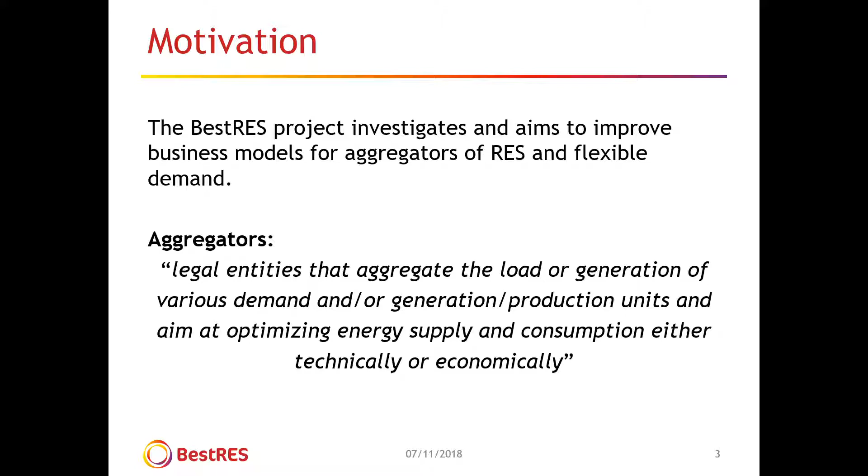In this project, we have a lot of partners. First, the coordinator is WIP from Munich in Germany. There are the technical partners 3E from Belgium and Technical University of Vienna. Then we have legal partners, Stiftung Umwelt- und Energierecht from Germany. And URIS is supporting us with the dissemination.

Furthermore, we have a lot of aggregators in the consortium that cover a lot of European countries. We have Next Kraftwerke, which you probably know, active in Germany, Belgium, France and Italy. We have Good Energy, an energy supplier in the UK. We have EDP, the Energias de Portugal, a supplier in Portugal and Spain. And furthermore, we have a research center in Cyprus, supporting us to bring the south eastern perspective into the project.

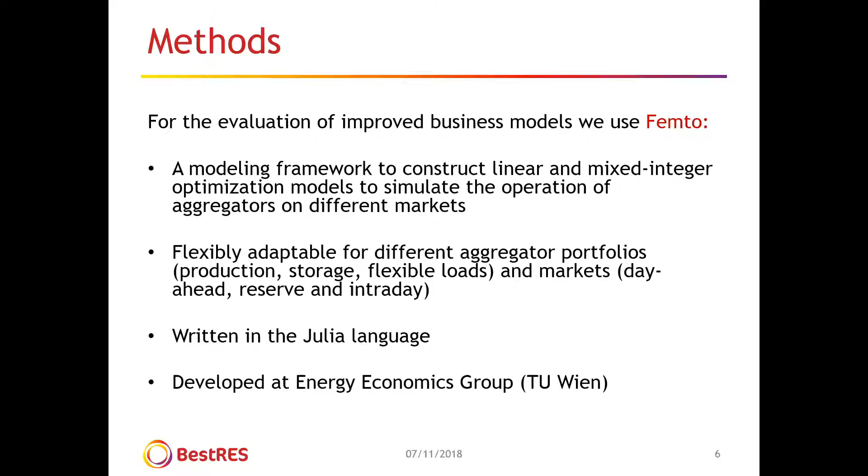I won't stick too long with the methods, but just to give a quick introduction, we used here a simulation library that we developed at our institute that allowed us to model and simulate all these different kinds of business models that have been developed.

Now I will go to the first example, which focuses on the aggregator EDP. EDP wants to use the flexibility of their medium to large scale energy customers to optimize energy procurement or reduce imbalances. I'm not sure how much you are aware of these imbalances, but balance responsible parties are obliged to match demand and supply, and if there are deviations, they have to pay imbalance prices. And for this we...

We defined two different scenarios. The first scenario is to use the flexibility of the customers to optimize energy purchase on the day-ahead spot market, and the second scenario is to reduce the imbalances of EDP. Then we analyzed a third theoretical scenario that chose the best of the two other scenarios each hour, but it is theoretical because we do not know beforehand how much the imbalance prices would be, whereas for day-ahead spot market prices, we have quite good forecasts.

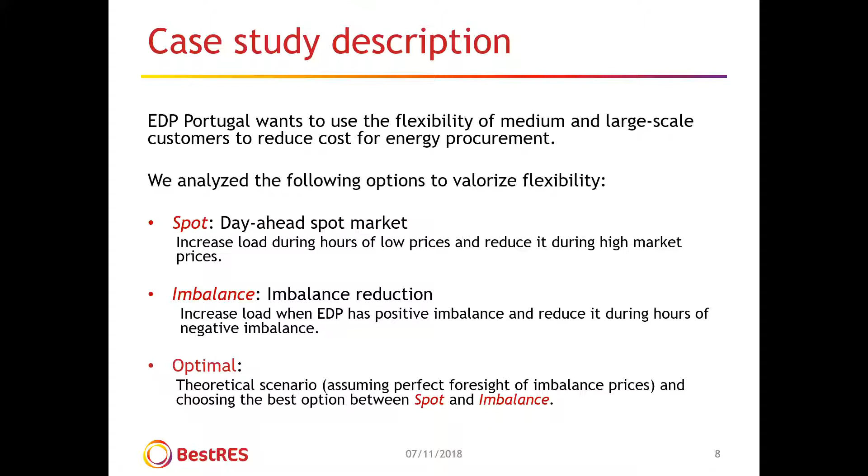So just to give a quick overview on the model scaling here, we considered three different loads from different industrial customers. We scaled them all to the size of 1 megawatt, and we made different assumptions on the flexibility that would be available by these loads.

So one load we assumed could be changed by 10% up and down, and we defined something like an equilibrium period, so we deal with shiftable loads. If we increase or reduce it at some point during a day, we have to compensate at another point in the day. For the other two loads, we also had some restrictions on the number of activations per day and the duration of these activations.

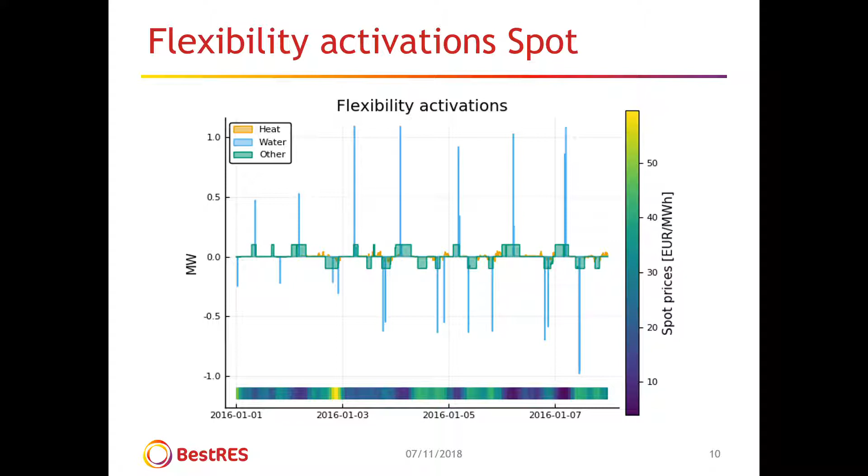Here on this graph, you can see how the model in operation looks like. At the bottom bar, you see indicated the market prices during the respective hour. The brighter the color, the higher the market prices, and the darker the color, the lower they are. As you can see, the three different loads react to these prices, decreasing at hours of higher prices and increasing at hours of lower prices. These are the flexibility activations of one example week in the spot scenario.

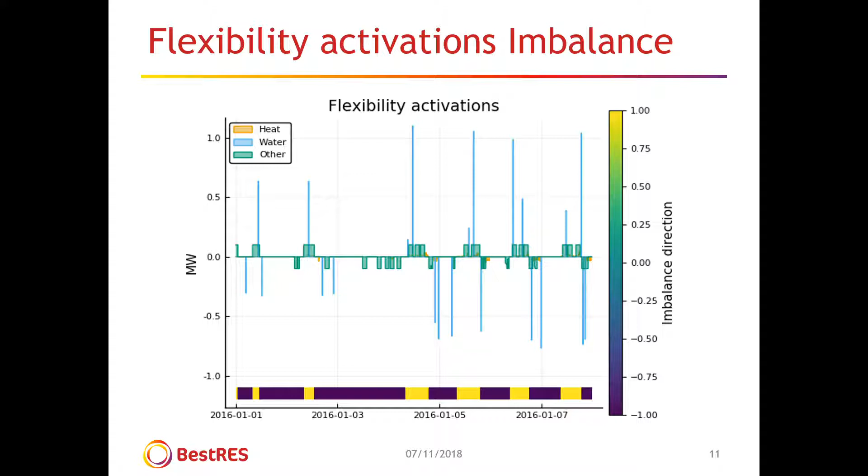In the imbalance scenario, we do not have any prices available. Here we only have the direction of the imbalance of EDP's balancing group. So if the bottom bar is darker, EDP has a negative imbalance, which means there is more demand in the group than supply injection to the grid. In the yellow areas, there is a positive imbalance. And these flexibility activations react to these imbalances here.

Then we come to the annual results we got. We used load, market, and imbalance data from the year 2016, and simulated this all on a quarter-hourly basis for this year. We see here the results in the two different scenarios. What we can see is that the spot and the imbalance scenario achieve quite similar results.

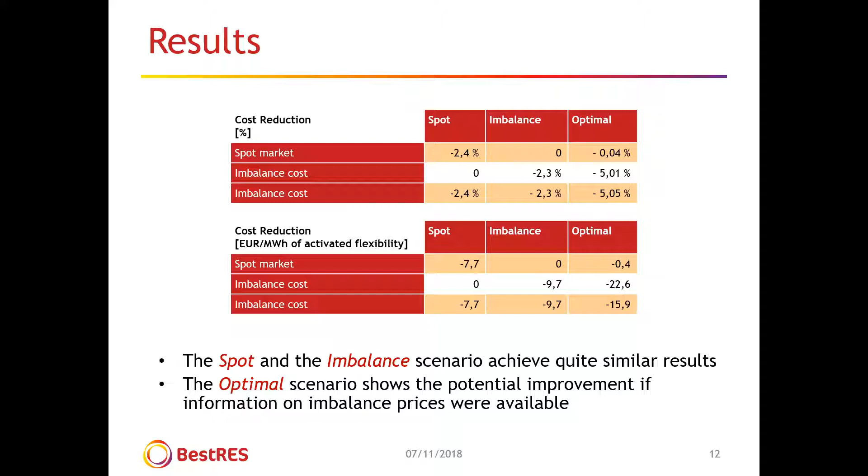For these loads, on average, a cost reduction of about 2.4%. In the optimal scenario, if we would have information about the imbalance cost at the respective hour, we could more than double these benefits. So that's the first example that I wanted to show you.

The second example is very interesting. It is about using the flexibility of an industrial customer as a third party. This is about Next Kraftwerke Belgium. Probably a lot of you know it. They are pooling different customers and marketing them on different markets, but they always have difficulties acquiring new customers who already have a supplier which has quite competitive prices, but doesn't offer flexibility activations to their customers.

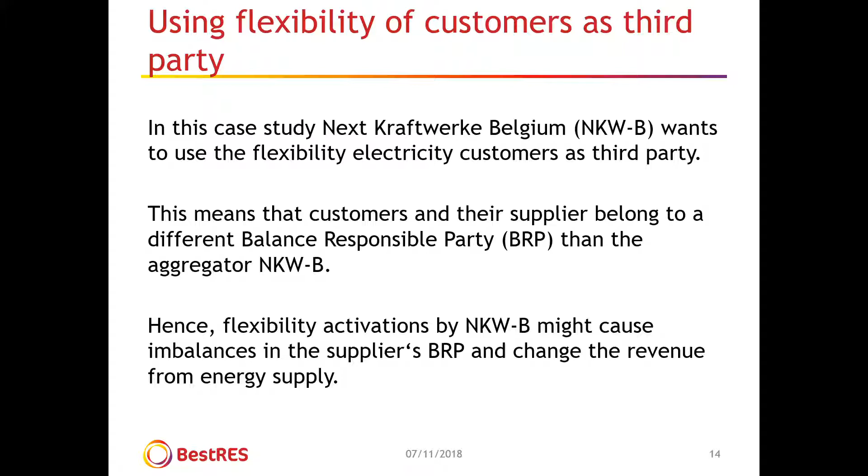So Next Kraftwerke would like to use their know-how on marketing these flexibilities, but they need to find bilateral agreements with the supplier to be able to market these flexibilities, because if they schedule flexibilities of their customers, this influences the imbalances of the supplier and also the cost, the revenue that the supplier gets from these customers. And hence, these bilateral contracts are required.

So a bilateral transfer of energy contract is required between aggregator and supplier, so that the supplier does not lose revenue from the customer, and this is often quite hard for Next Kraftwerke to achieve such contracts.

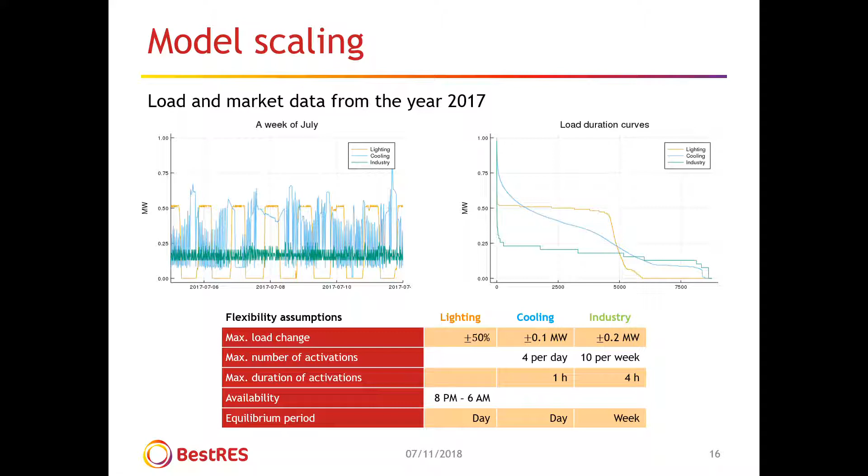We defined here three scenarios. The baseline is just that no aggregator is involved at all, flexibility is not activated. In the spot scenario, Next Kraftwerke is using the flexibility of their customers to optimize the day-ahead schedule. And in the reserve scenario, flexibilities are used on the tertiary reserve market in Belgium, the mFRR market. For this, we use a diesel generator as backup, but load flexibilities are prioritized.

We assume again that these are shiftable loads, so reserve activations have to be balanced again, because reserve activations are not known beforehand. And if the reserve gets activated, then the load has to buy this energy again that it has reduced.

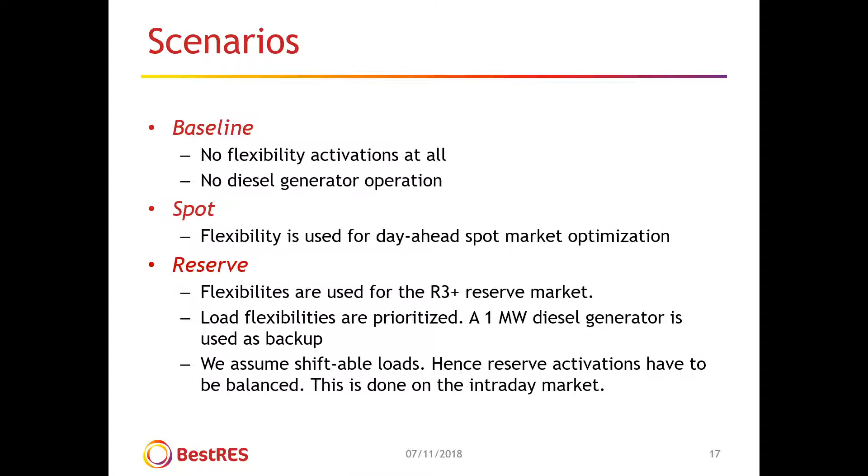So here we assumed that in these scenarios such a bilateral contract is in place between the aggregator and the supplier, so that the supplier does not lose profit from selling energy. In the baseline, we are not looking at grid costs here, but only at the energy costs from purchasing this energy from the market.

In the baseline scenario, on top we see the cost of the customer, and I don't know how good you can see the numbers from here, and on the bottom we can see the profit of the supplier. So he gets exactly the cost of the customer and has to buy this energy that he gets from the day-ahead market.

In the spot scenario, we see that the supplier has the same cost because he still schedules the same profile of the customer, but he gets different revenue from supply because flexibilities are activated by Next Kraftwerke Belgium, and this difference has to be balanced out by this supply transfer.

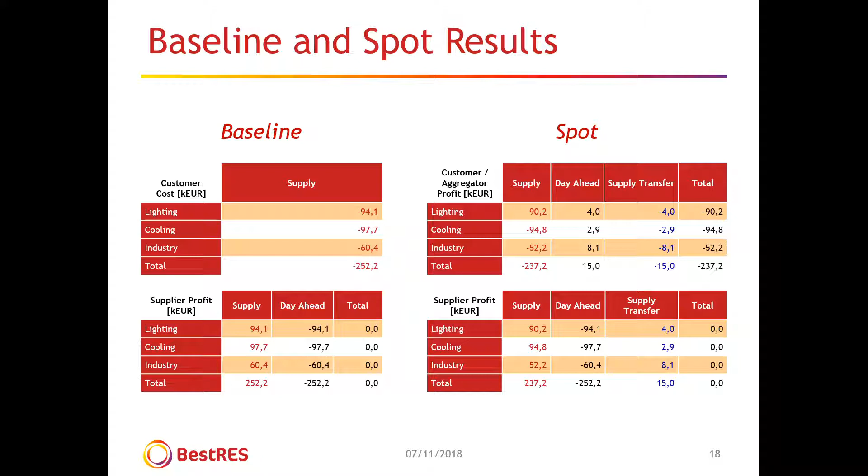Which is dealt with in the transfer of energy contract. And the reserve scenario is a little bit more complex. Here we also have, I won't go into detail, revenues from reserve activations, costs from intraday rebuys, and imbalances caused in the supplier's balancing group. And all this has to be balanced out again in the supply transfer contract.

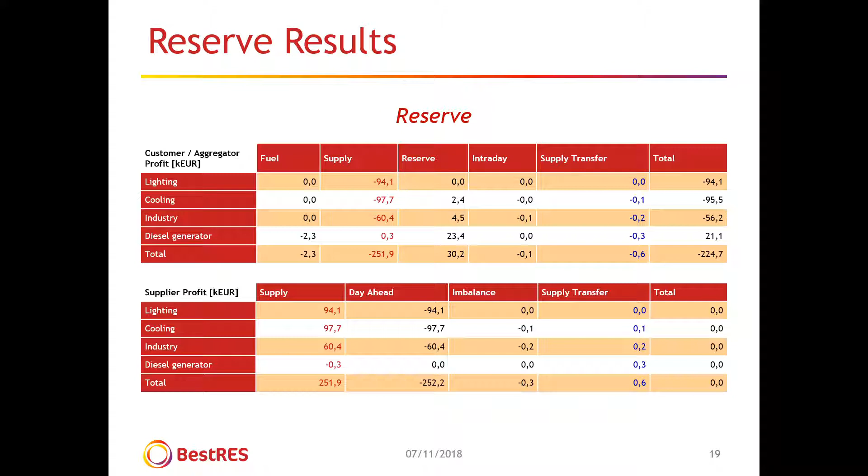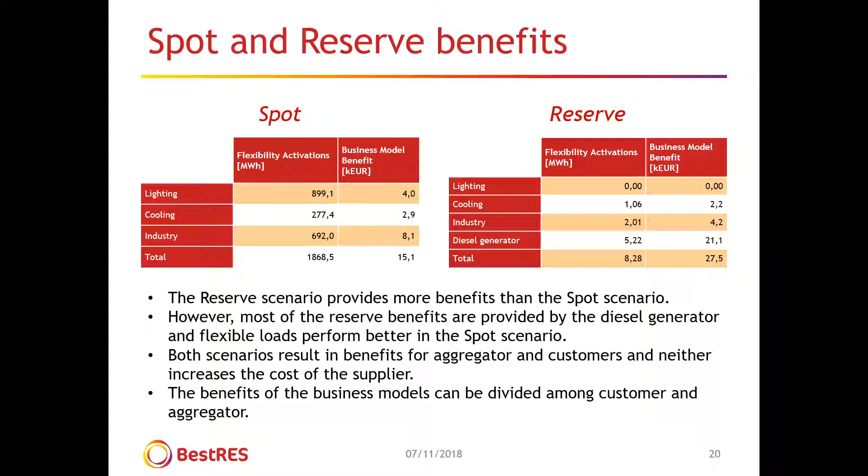As an overview, here you can see the benefits that this business model brings to the aggregator and customer together. We have not defined a specific share of how these benefits are shared amongst customer and aggregator in these business models. There are different options for this, which we do not deal with here in our simulations. But what we can see is that in total, in the reserve scenario, more benefits are achieved, but most of these benefits are achieved by the diesel generator. For the flexible loads, the spot scenario provides better results.

Then a few short conclusions. Flexible energy demand can be used in various ways and various markets to generate benefits for energy customers, and aggregators with their know-how provide a possibility to do this for them. We analyzed several different business models. The two are presented now. We also analyzed one for Next Kraftwerke Germany, where we also took into account the network charges in the optimization of the energy cost. This demand-side flexibilization can result in win-win situations among multiple participants.

Thank you for your attention.

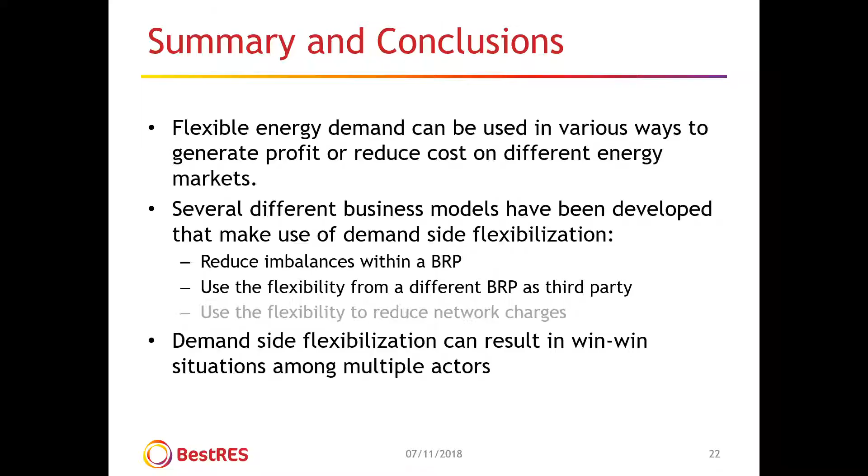And stay there, you don't get off that easily. I've got a question for you. Anyone in the audience have any questions? I know this is some quite complex stuff. I'll throw you my question first.

So, does it mean that in the future model, if the energy supplier is also the aggregator, that it improves the economics because you don't get the negative effect and the need to have that supplier-aggregator back-to-back contract? Or is there still a role for an aggregator because of an additional part of the equation?

We identified several roles of aggregators in the project that an aggregator can take. We identified combined roles, like a combined aggregator supplier. I guess this was what your question is targeted at. Here the aggregator is offering these aggregation and flexibility services together with the supply contract to the customers. But we also identified independent roles where, as I said, in Belgium for Next Kraftwerke, they are struggling with customer acquisition because a lot of customers already have long-term contracts with energy suppliers that Next Kraftwerke cannot compete with, but these suppliers do not offer this kind of flexibility services, and that's why such third-party business models could be interesting for the customers in these scenarios.

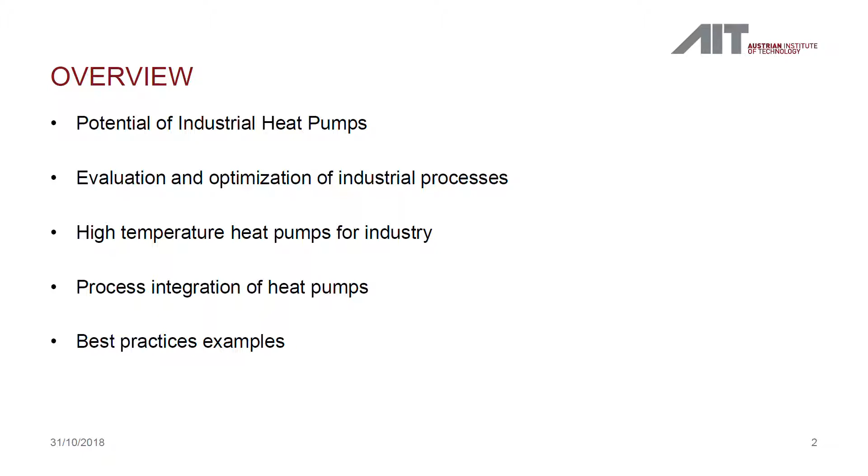Today I will talk about heat pumps in process industry, and I'll give you a short overview of my presentation. I will talk a little bit about the potential, about the question why we should or could use heat pumps in industry. Then it goes to the question of how to integrate this technology into industrial processes. I will give you a good overview about the state of the art and also an outlook about the technology itself, and talk about process integration. Last but not least, I will end with some best practice examples coming from Austria at different levels in different industries where heat pumps are integrated.

The heat pump itself uses a so-called refrigerant, which is a chemical media pumped more or less in a circuit. This media changes its phase from liquid to gas phase, and this change is used at the heat input side as well as the heat output side.

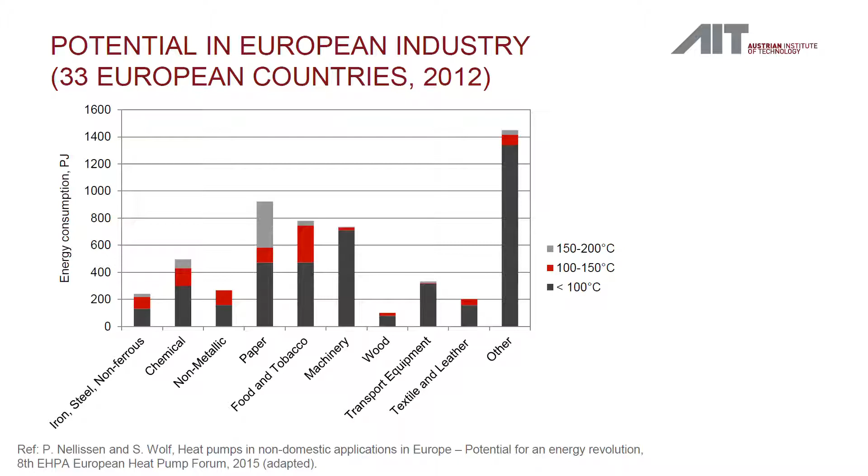But you see here also relevant numbers in terms of energy in petajoules - this is about Europe. So here in principle we can see that heat pumps have a huge potential for increasing efficiency in industry. I will give you also some numbers coming from Austria - here just a short overview about the final energy consumption.

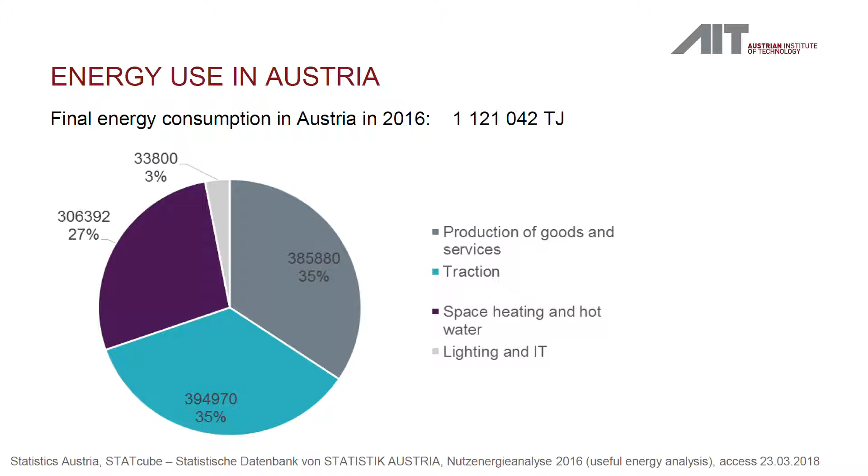Industry accounts for about one third of energy consumption, and there we can more or less install our heat pumps. We will not solve the decarbonization and energy topic with heat pumps alone, but they are a main part of this transformation in the energy system.

Here's a different view of energy carriers in different industrial applications. The biggest carrier is natural gas, but it's not only used for high temperature issues, it's also used for steam topics and low temperature issues. This is a good indicator for this transformation: we have to use waste heat, but also upgrade this waste heat to reach steam systems and substitute the gas topic.

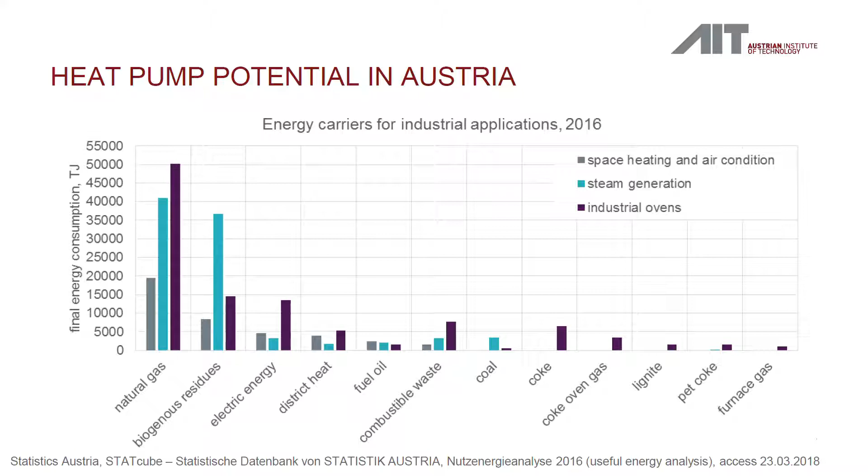What we did in Austria two years ago was a kind of roadmap. We involved all the stakeholders, industry and public stakeholders, to develop an outlook and a state-of-the-art review of how the topic stands in industry at the moment. You see the numbers here, which are not quite high, being honest, and we developed different scenarios for how this topic can develop.

There are different reasons for these not so high numbers. One is that there isn't really a long tradition in statistics for industrial heat pumps, and there's also overlap with refrigeration systems, so it's not always clear what is a heat pump and what is a refrigeration system. But the systems we have installed have really high capacity. So the message is we see a quite positive outlook, but there have been some frameworks needed for this to land.

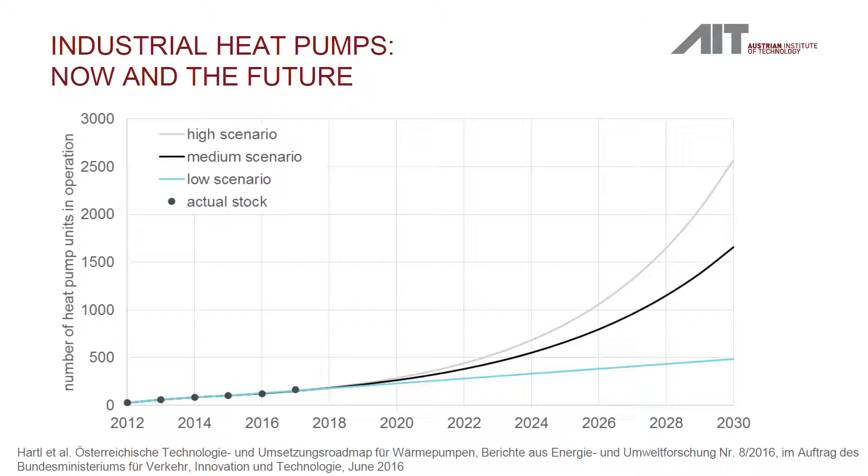I will now go into more detail on evaluation and optimization of processes. When we ask where to use a heat pump in industry, remember the picture at the beginning: you need two sides. One side is that you need a really good heat source available. On the other hand, you need a heat sink where you have the heat demand. If you're missing one of the sides, a heat pump could not work, and it doesn't make sense.

There are different heat sources like waste heat from chillers and refrigeration processes at around 30 degrees C, waste heat from process cooling normally rejected via cooling towers and not used at the moment at 50 degrees C, wastewater, and the last point with really high potential: off-gas streams, maybe from gas boilers, flue gas, but also drying processes. Later I'll show more about drying. These have high humidity and therefore really high energy content in the gas, which is a really good opportunity for heat pumps.

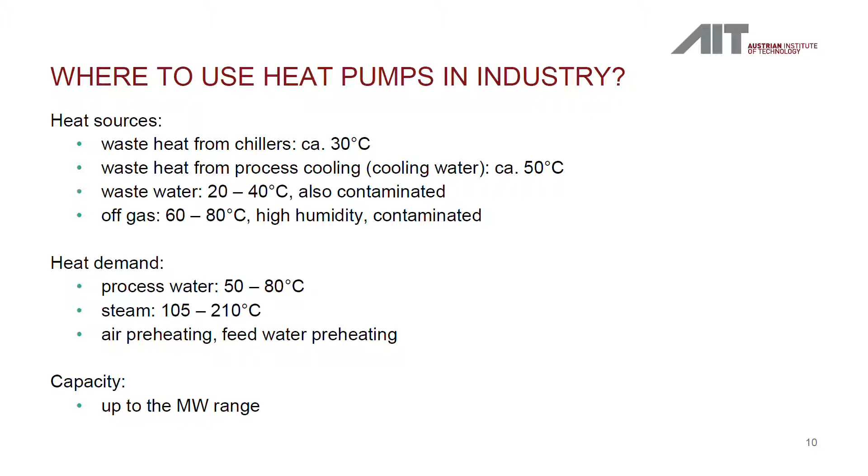On the heat demand side, we also have low temperature processes in industry at the moment, as well as steam processes fired or generated by gas or biomass. In future we have to use heat pumps for this, in my opinion, and we can also use heat pumps for preheating air or feed water. What's also important is that we need capacities up in the megawatt scale and range.

This graphic might be a little confusing at first sight, but I think it shows the potential of heat pumps really well. On the left side you see the heat supply temperature, where you want to use the heat pump, from space heating up to district heating and low pressure steam, as I mentioned before. On the other axis, you see the reduction potential of CO2 emissions in relation to the source temperatures.

This is important, and it's also in relation to the coefficient of performance. You can see that even for really high temperature lifts for the heat pump, around maybe 100 degrees C, you can still generate a lot of CO2 reduction potential. This could be of interest concerning CO2 taxes, as well as requirements from customers in the supply chain to reduce your CO2 footprint. The right picture shows more or less the same thing, regarding economics.

We have different issues in industry. The first indicator for checking the potential of a heat pump is the ratio between gas and electricity price, which relates to the coefficient of performance. The issue in industry is that you have different scales and therefore different electricity prices, and somehow also different gas prices. This scheme shows you the dependency on low and high electricity prices, also the demand for cost reduction.

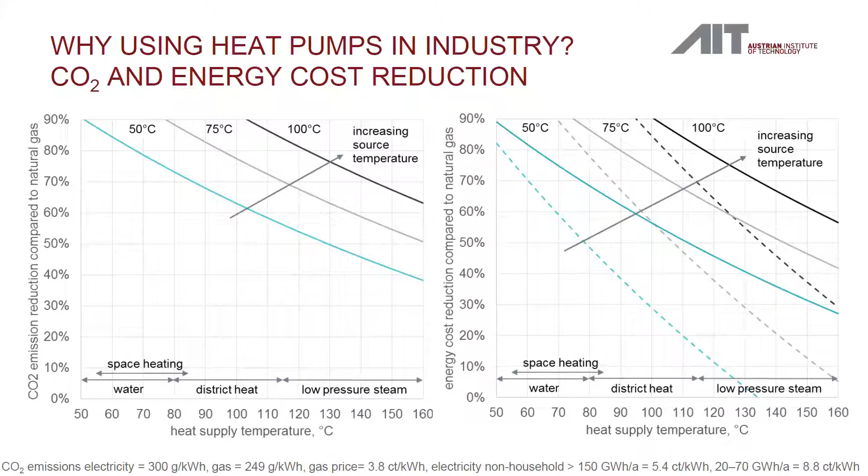So it's only about the operational costs, not the investments, but the potential for large-scale industry is really about, I would say, a medium 50 to 60% of operational cost reduction. So this is, I think, also really important.

Here's an example coming more from the research side. We know we have really complex systems in industry, really in big industry. There are different methods for the integration of efficiency measures. Maybe some of you know pinch methods, used to optimize more or less all these heat streams and cold streams in a system.

What we've done here is, in reality you don't have steady state streams, you have batch processes and so on, and we have developed methods using mathematical programming to integrate heat pumps in really complex networks. This is really good because it has cost functions behind it and can calculate the capacity of the heat pump itself. So it's also a support for the planning and design issue of how to integrate the heat pump. We've compared this with state-of-the-art methods, and you can reduce more or less up to 50% of your investment costs through more optimized design regarding the processes themselves.

So this is not a standard engineering tool, this is just coming from a research point.

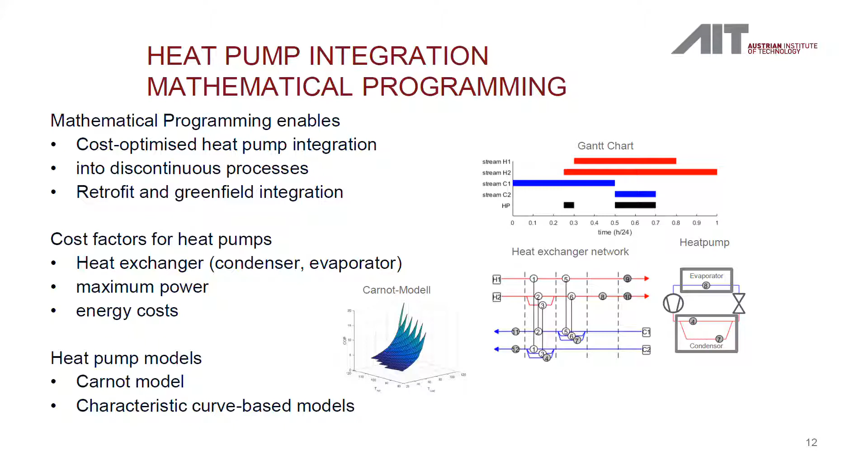What are the challenges for the heat pump itself, for the technology? I've called them research questions. The first thing is the refrigerant itself, which must cover a lot of requirements. Maybe some of you know we have an F-gas directive in Europe, which is phasing out some refrigerants with high GWP, global warming potential. But there are solutions available, like synthetic refrigerants, these HFOs, or natural refrigerants like butane or other hydrocarbons, also water for high temperature heat pumps.

We need temperature resistant materials like sealings and oil for the compressor, and we need efficiency measures like ejectors, which can increase the efficiency in the heat pump itself. But also for the compressor, there are some requirements concerning cooling. I think these things are solvable from the technology side, so this is not a barrier that becomes a showstopper for the technology itself. And last but not least, of course, there are requirements coming from reliability and also short payback time from industry.

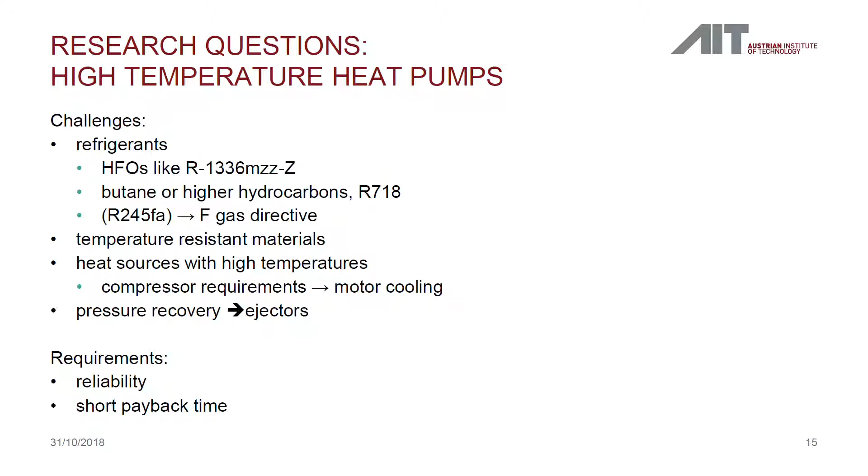Here I want to introduce a research project. This is the largest European research project, led by AIT. It's going in the direction of demonstrating heat pumps in drying processes in industry up to 160 degrees C. We have two application sites in Austria: Wienerberger, the largest brick manufacturer in the world, I'll show you later how to integrate a heat pump in a drying process, and also Agrana, coming from food production in the starch drying process, where heat pumps also make sense and were tested. If you're interested, these prototypes will be installed during the next year, and after this we'll have monitoring and results to show how these systems really work on-site in industry.

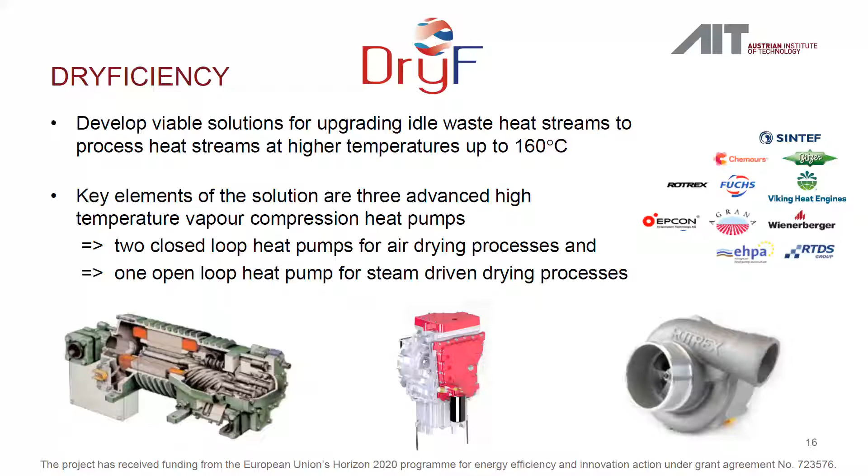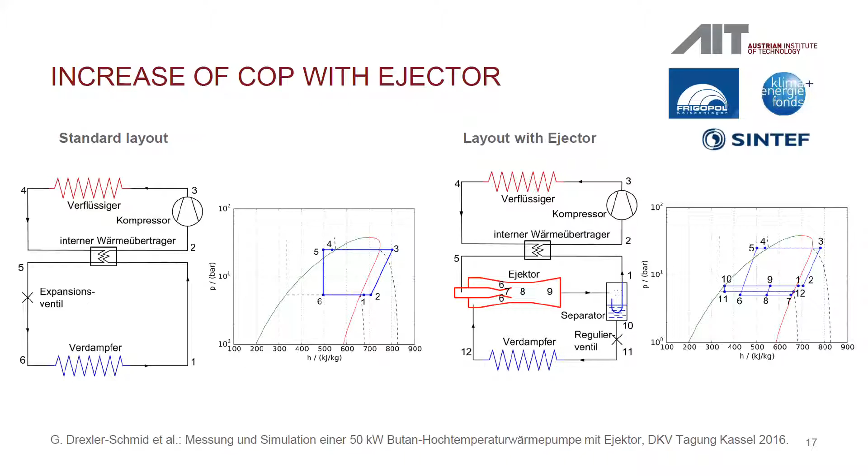So there are some further research questions. But as I mentioned before, I think it's really important also to talk about the process integration topic. Process integration means that you have also some planning and interaction topics in between multiple stakeholders.

So you have on the one hand the technology provider, the companies I've mentioned before. You have the application side, and you have also in between the planners or the plant engineers, and all sides need some knowledge about the technology and also how to integrate and operate it. This leads to these topics: design optimization, operational optimization, and there are methods available, like mathematical programming, but also dynamic simulations, where you can test controlling strategies and the feedback loop on the process itself if you use a heat pump in your process.

So it's not a plug and play thing. In some processes there are also feedback loops to operate the process at different temperature levels, with different parameters, so that the system itself has a better optimum than the technology itself.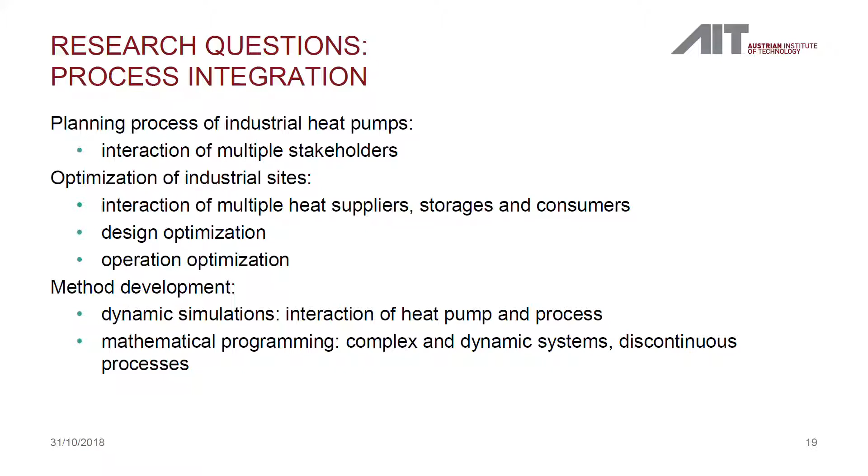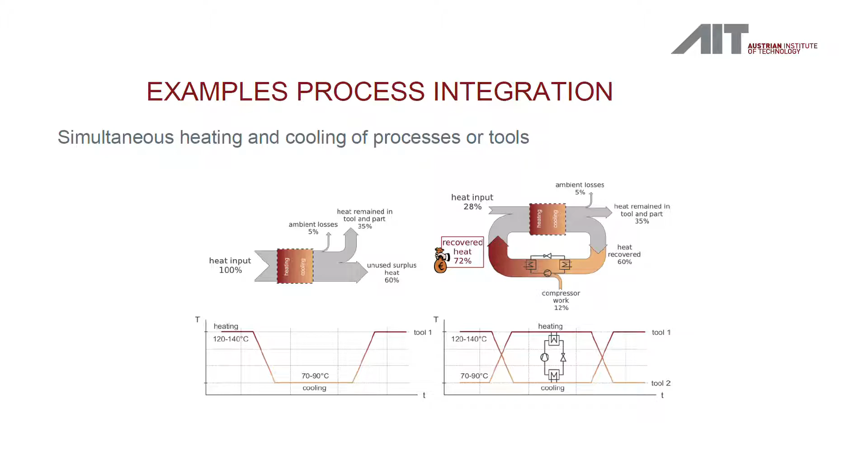Where you can integrate heat pumps, here's a really simple picture. We have in industry a lot of processes where batch processes go in the direction of heating up, for instance a tool in plastic or metal industry, and then 5 minutes later you cool this down. You can integrate a heat pump here, putting it on the heat and the cold side, and put different machines in parallel. There you have some theoretical potential for energy savings, about 70% of energy consumption.

I think more of interest is the drying issue I've mentioned before. State of the art, most drying processes work like this: you have a carrier, in most cases air. You heat up the air with a gas boiler, and the air is cooled down over the product, taking up the water, the humidity, and this humid air goes off the process and is therefore lost. This is more or less the left side.

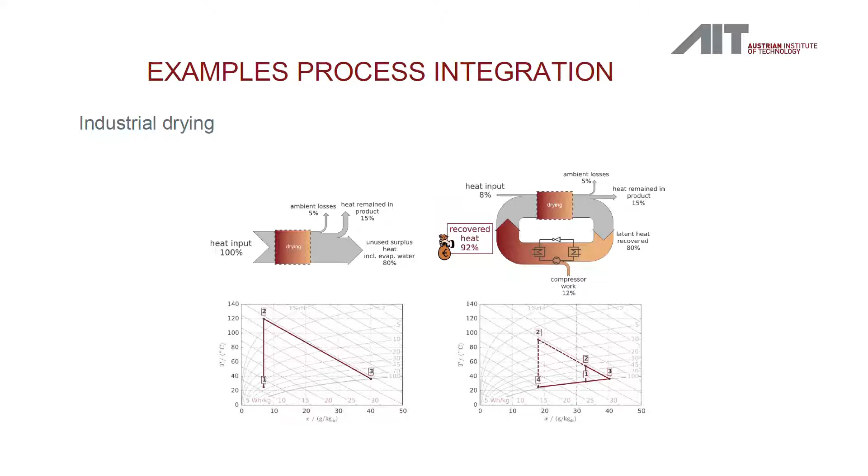You can integrate a heat pump there, and the difference is that the heat pump condensates the water in the steam and uses this really high energy amount, bringing it back to the process itself. Therefore, you don't have any gas off, you have some water off more or less of the process, and theoretically you can reach up to 90% energy recovery. In reality, with this brick drying process, we try to achieve 60%, but this is also really a high amount of energy savings.

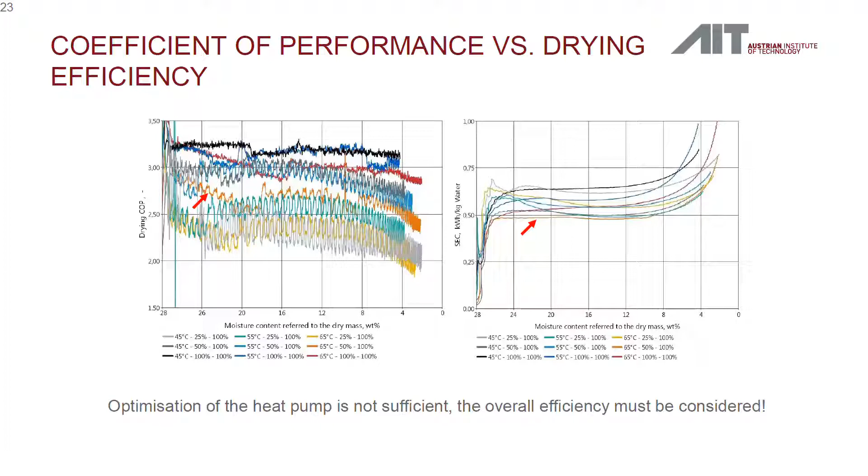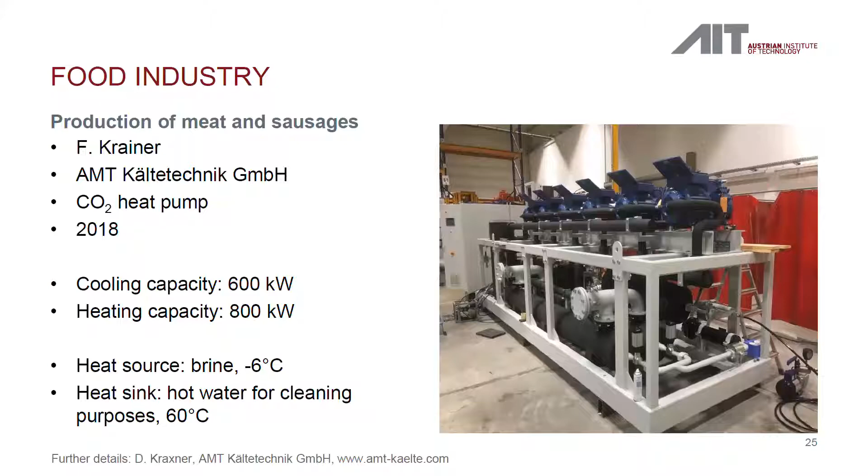What is of interest here is we have medium temperatures. You see a picture of what a heat pump looks like. We have a capacity around 800 kilowatts of heating capacity, a natural refrigerant with CO2. This was installed this year, so this is really a new application.

If it goes then to steel industry, this is a project, also really a young project with really high capacities. This is done by a Swiss manufacturer, so they are building really the highest capacities. This is used to use the process water, the waste heat from the metal industry for district heating in Graz, the second largest city in Austria, and can really create a large amount for the district heating system over the seasonal performance of the system. So this is really, I would say, good application, not in the process itself, but using the process for the supply of a district heating system.

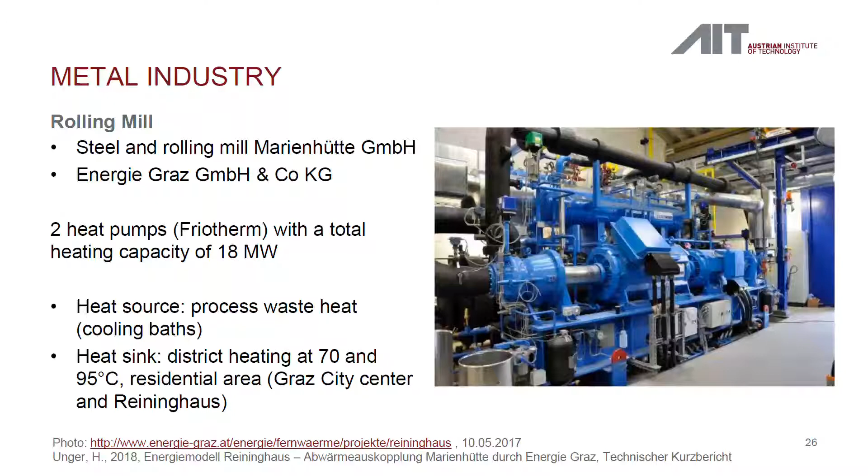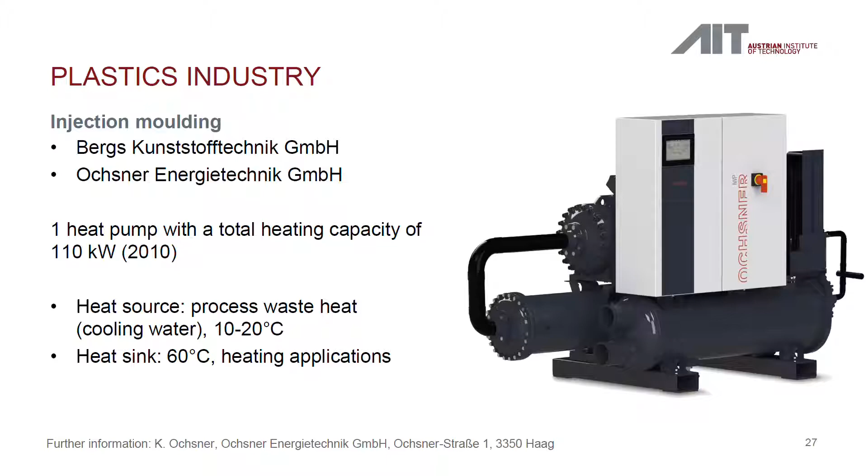This is an example coming from the plastic industry, installed in 2010. So this system has been running some years, also with moderate temperatures, but this is a process integration showing that there are also lower capacities available, around 100 kilowatts of heating capacity.

So that was also my last slide. Thomas, thank you for your attention. And thank you very much.

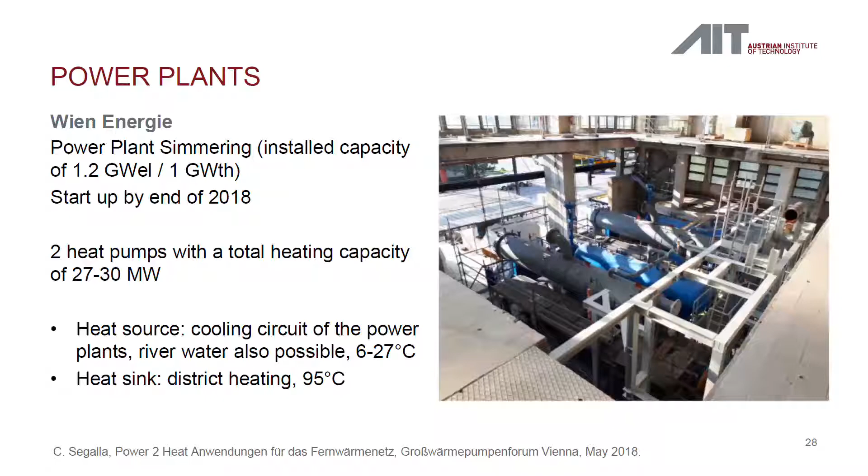For me, it seems like a no-brainer. I mean, we can see the efficiencies that in those type of processes are. It ticks lots of boxes. Yep. So what are the reasons that maybe companies or processes don't use heat pumps? Is it technology? Is it investment? Is it understanding or complexity?

Yeah, I think it's all what you mentioned. So what I've seen over the last years is that it was not clear that heat pumps can go to higher temperatures. So therefore, there was also this research topic launched, not only here in Austria, but also in several European countries, going also this demonstration way. That's the first point. The second point is a lack of experience for planners, but also for the end consumers in industry. I think, therefore, it's also important to have these activities showing the best practice examples. And of course, there are always some issues in relation to framework conditions, in terms of what are the electricity prices. And what I see, for instance, you've seen some companies where we install the heat pumps - they are international companies, and it makes a difference for the same technological solution in which country you can install this and where not. It's not a unique market in Europe about energy prices, and I think those are the main reasons for this.

Makes sense. Any final questions before we wrap up this session? Okay Thomas, thank you very much indeed. Every time I eat a Vienna sausage, I will be thinking of your heat pumps. Perfect.

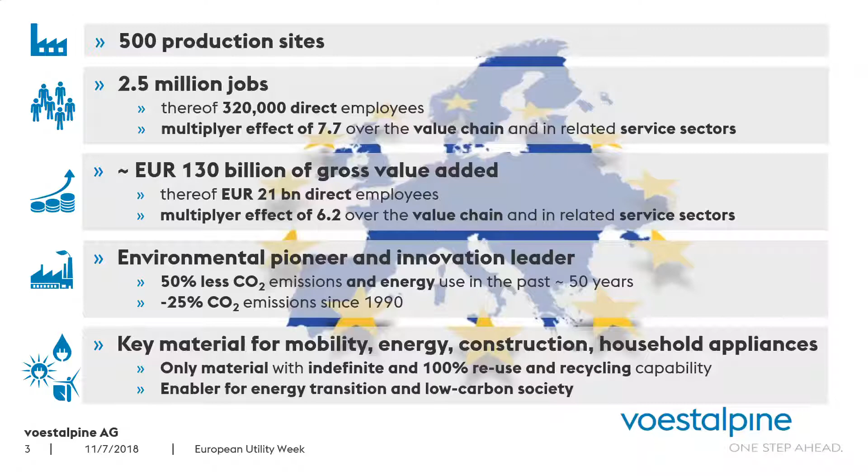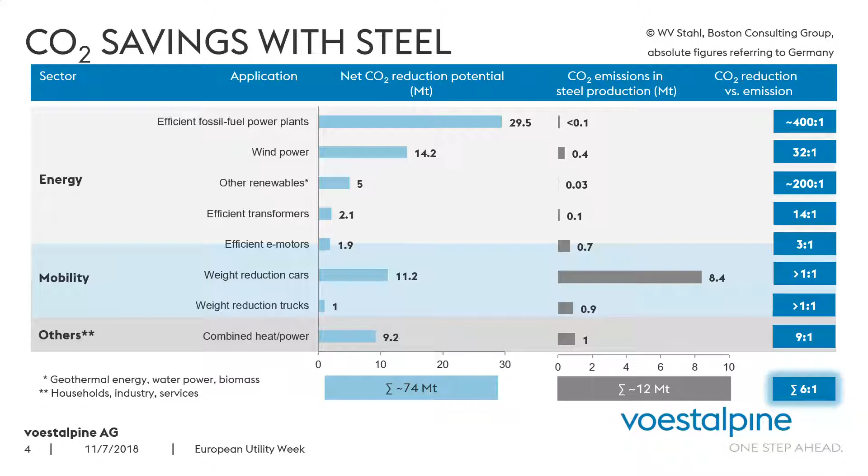The current situation. Before we talk about the future, let me briefly describe the current situation of the steel company and the challenges we are facing.

First of all, I want to clear up a widespread misunderstanding right at the beginning. The equation less CO2, less energy does not apply to the steel industry. We cannot simply change the plug. We have to fundamentally change our entire energy management system and production technologies. We have to replace the fossil energy equivalent with external renewable electricity.

Now we are using coal. With the example of the two voestalpine steel production sites in Austria, we are talking about 33 terawatt hours, or more than 30 Danube river power plants. For the European steel industry, the dimension for full decarbonization would be 500 terawatt hours.

So why is that? What are the specifics in the steel industry? Fossil raw materials are required for the conventional blast furnace steelmaking process. There's yet no other way in this route to get, simply speaking, the oxygen out of the iron ore. The energy contained in our process gases is transformed in our own power plants into electricity. This makes us largely self-sufficient with electricity to more than 80% and mostly independent from the external grid.

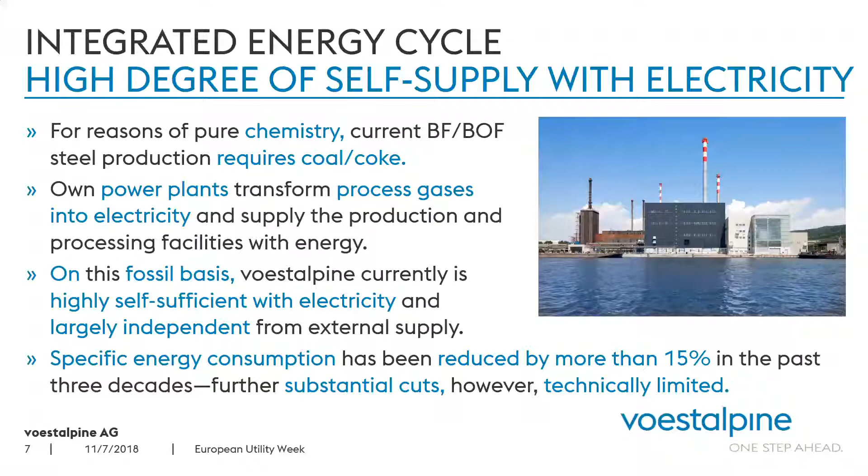Steel industry in general, and voestalpine in particular, is committed to climate protection. We have to develop entirely new production technologies, mainly based on the utilization of hydrogen. But it's not only a long-term challenge for R&D, broad-based implementation must also be commercially competitive. However, we cannot do it alone. As mentioned before, and I would like to repeat this point, the fundamental transformation of the entire energy system as we know it today is a precondition for successful decarbonization steps of the energy-intensive industry. It's about partnership across and within sectors, and it requires, above all, a European solution, not only a national solution.

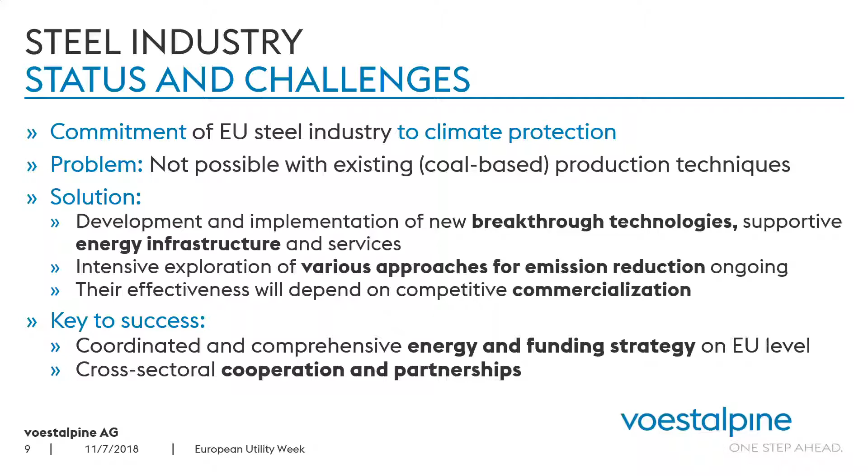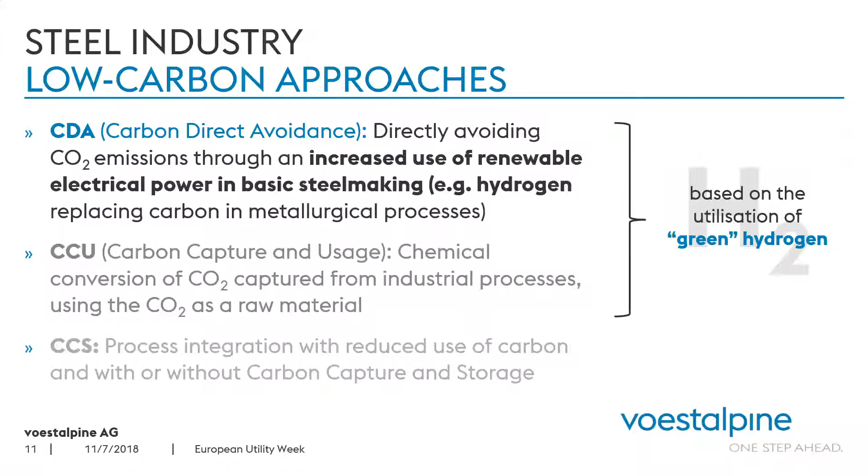What is the future vision of the steel industry, and voestalpine particularly? There are a number of approaches, and I suppose in the future there will be a mixture of these concepts, mainly carbon direct avoidance, CDA, and CCU, carbon capture and usage. The best way of dealing with CO2 emissions is simply not to produce them in the first place. This is why voestalpine is focusing clearly on carbon direct avoidance. CDA approaches are based on the use of hydrogen, that's green hydrogen, which is produced with renewable energy sources.

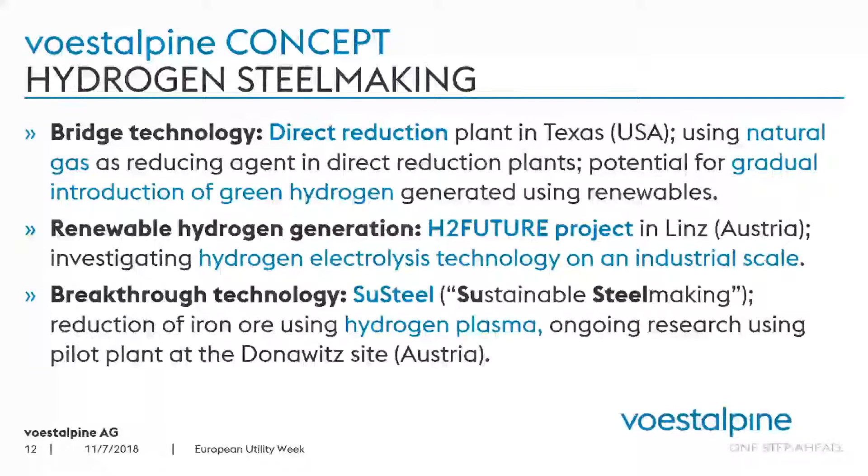We are consistently pursuing our concept of step-by-step decarbonization, and we have already started the transformation process at voestalpine. We are currently already operating a bridge technology in our direct reduction plant in Texas. In the first step, we have shifted from coal to natural gas with the option of gradually introducing green hydrogen in the future.

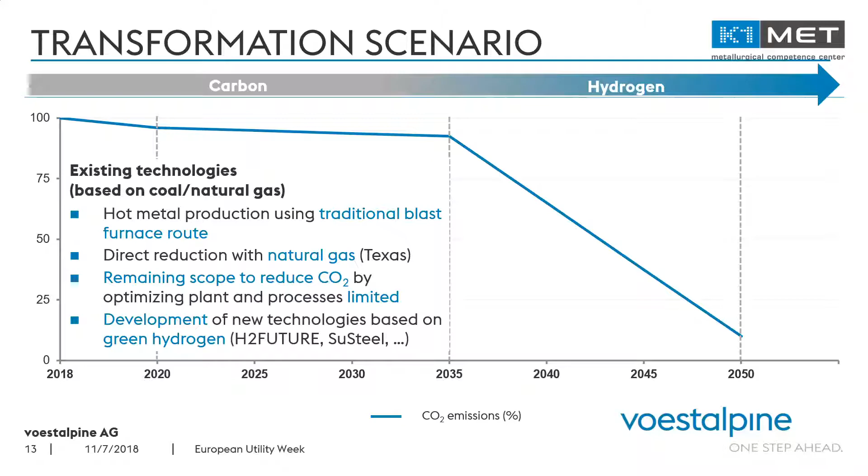We are consistently pursuing, developing and realizing a transformation path, as mentioned before, this is not a short-term challenge. The illustration gives you an indication of the transformation period from today until 2050 and the detailed steps we are planning or already taking. Until around 2035, the focus is on the development of new hydrogen-based technologies, followed by a period of implementing them in the long term on a large industrial scale.

In the meantime, we will do our own homework in research as well as in metallurgical and technological development, but in addition, this is the time for the energy transformation I mentioned before. When both tasks are completed effectively, then the base for the transformation or decarbonization of the steel industry is possible.

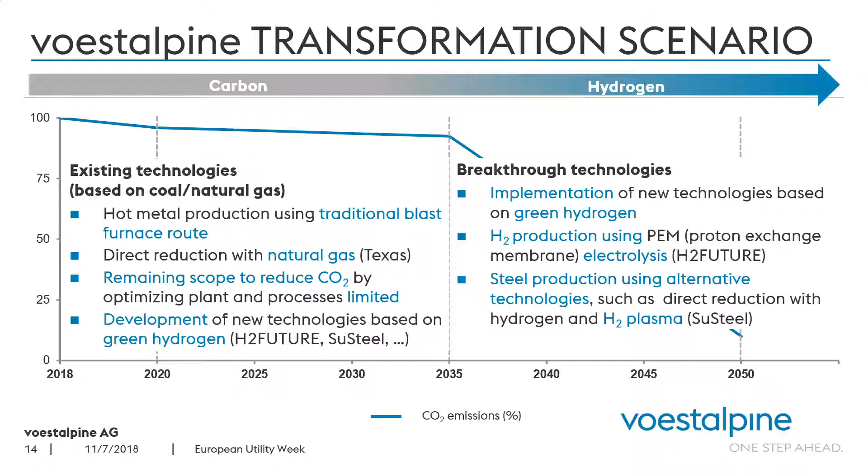Transformation to low-carbon steel making in the coming decades, however, is not for free. This illustration is only intended to give you an overview of the individual steps from R&D to full implementation of the new technologies in the years to come. The most cost-intensive part is not the development of the technologies, not the R&D, which is to a substantial degree supported by national or European funding.

It's mainly the upscaling from demonstration to large-scale operation plants, at the example of hydrogen metallurgy, the steps from grams to kilograms, and finally to millions of tons. For example, at voestalpine, we are producing 6 million tons of crude steel in Linz alone. And last but not least, the most crucial step: we will need to plan and build completely new plants in Linz and in Donawitz.

This is the largest part of investments, with around 7 billion euros. You can imagine that this dimension does not allow a wrong timing or the wrong technology decision. Furthermore, this requires a 30 billion investment in upgrading the system and infrastructure for green energy supply. This figure is for Austria's steel industry alone.

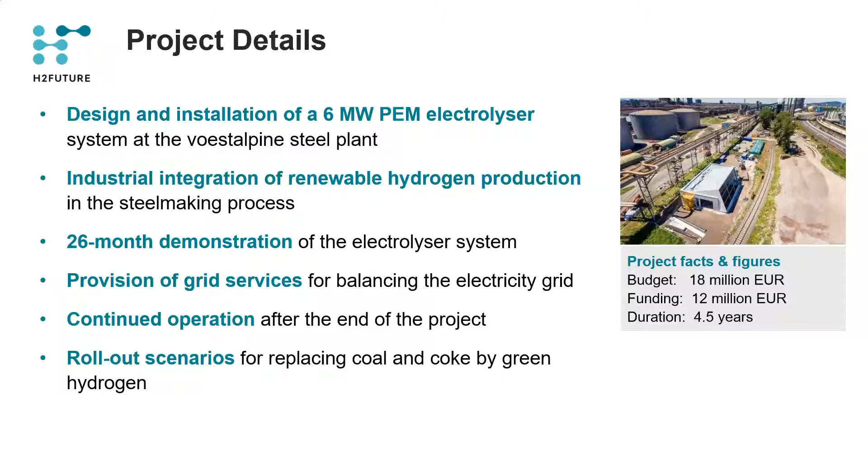Water electrolysis via electricity from renewable energy sources will become the main source of hydrogen, with basically no carbon footprint. The project partners are technological partners, plant builders, and science-based organizations. H2 Future is currently the world's largest and most advanced electrolysis project of its kind for the production of green hydrogen. Start of operation will be in spring 2019, start of next year.

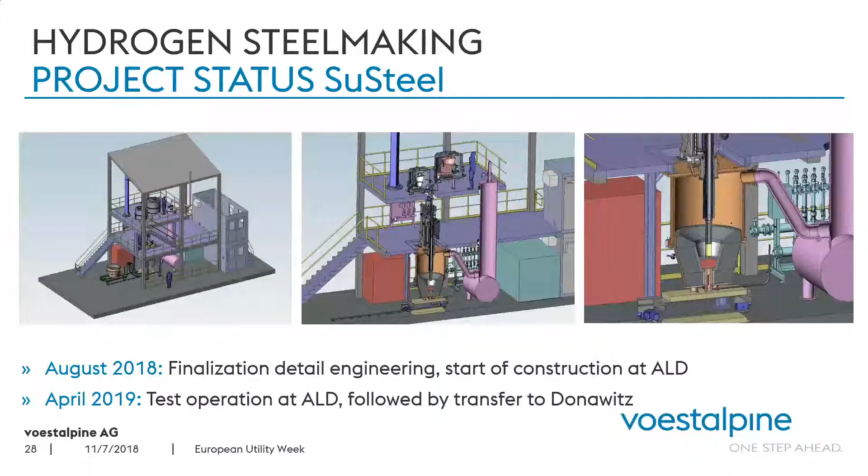This is the SuSteel project. As I told you, you can have a look at this lab project, but I will skip that and go to the summary because time proceeds.

What are the real success factors for success of the transformation process? First of all, sufficient availability of renewable energy in various forms, electricity, hydrogen, for all sectors, for mobility and industry. Secondly, renewables have to be competitive, especially when it comes to operational costs, compared to non-European competitors. The third factor, R&D and innovation, seems to be the smallest problem, because we as an industry have this more or less in our own hands, and that's our daily business.

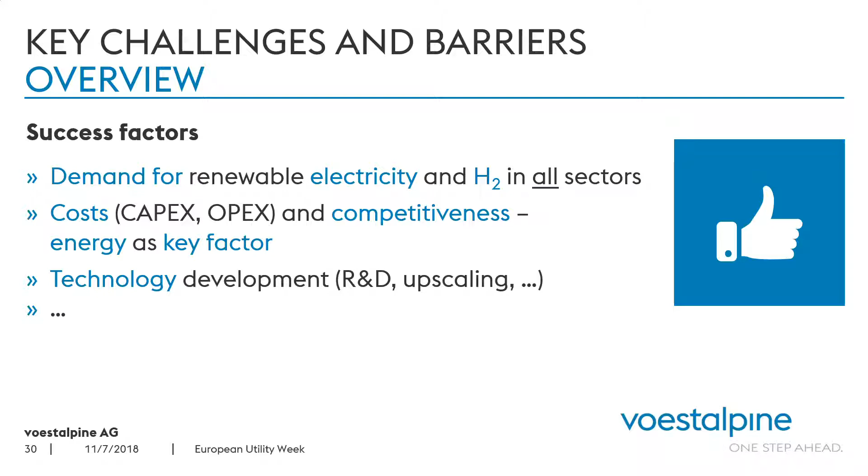Other critical issues which have to be discussed: who profits, but above all, who will have to pay for the energy transition? Which business model will prevail? At what costs? There are some sectors that cannot simply pass their costs through to the final customer, and worse, they do not even create added value by producing the same product in only a greener way. The quality of the product will not be improved.

These are the issues that have to be addressed and coordinated on a multinational and at least European level. And on a political level, there have to be some decisions made. Who will answer these questions?

What do I think we need to make decarbonization realistic and successful? As I told you, we cannot do it alone as steel industry. A fundamental transformation of the energy system is necessary, and we have to remain competitive as an industry and as the European Union in general. We need ambitious, but at the same time realistic plans, because additional renewable energy is required for all sectors, not just for the industry.

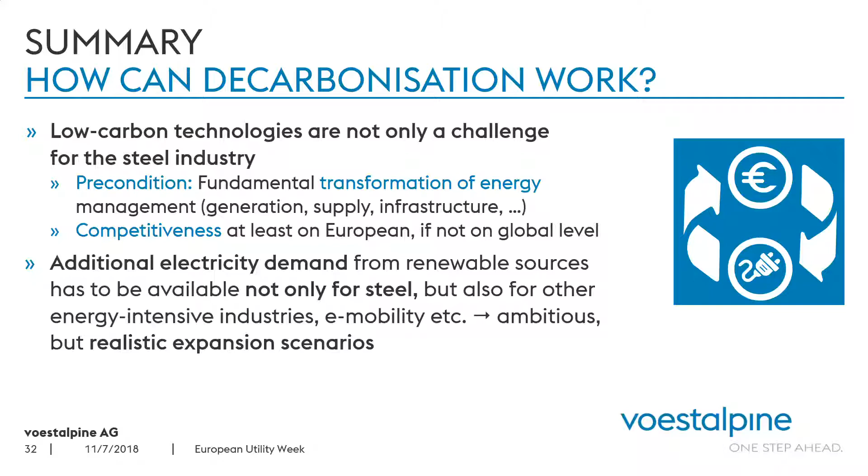So I think I finished already. That's the last one. Okay.

Johan, firstly, it's a fascinating presentation. I wish we had the answer around this table. I mean, it's such a small problem.

You're right. Exactly. So what I think is fascinating about this is that clearly the steel industry is of strategic importance to us as a continent. Today, if I understand it correctly, we have steel production plants co-located next to coal generators to provide the energy. In this future world, if we want to deal with decarbonisation, and we've talked about hydrogen, we're going to need significant amounts of electricity capacity to create that hydrogen for the process.

So that leaves us two options. Option one is that we have to extend and beef up the grid connection to those steel plants. Or option two is that we either relocate steel plants next to wind farms, or relocate wind farms next to steel plants. Which way do you think it will fall? Do you think the grid will have to increase its capacity for those locations, or do you think some form of renewable energy will be generated on site?

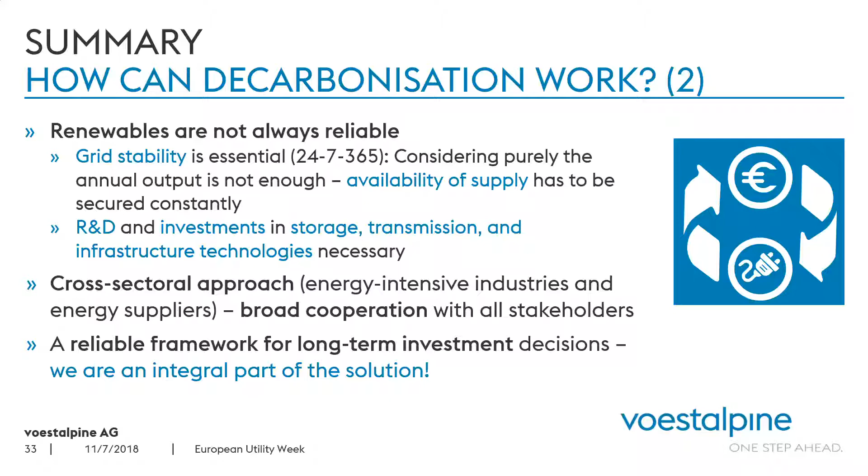You have to know the European Commission recognized in the meantime that for energy intensive industry that is global playing, the emission trading system, meaning carbon pricing, is not the suitable instrument to transform. Therefore, we get a lot of free CO2 certificates to be protected against steel flow from China to Europe or wherever, from regions where there is no carbon cost burden. But a small amount, not so small, I would say a third of all carbon dioxide emissions, we have to buy at the market.

And this is at the price of 20 euros, you can say for voestalpine alone, approximately 90 to 100 million euro. And with 90 to 100 million euro, you can't find cost parity between the technologies. And that's the real problem. If you want to use the carbon price to have cost parity, you would need a carbon price much higher than 150 or 180 to 200 euros per ton.

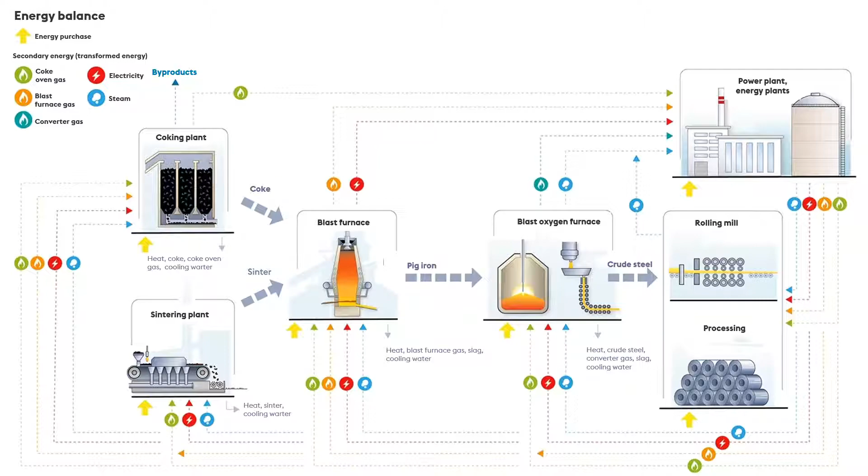Okay, while we take that quick overview of the European steel industry off the table, let's swap around, there's a microphone there. Can I give you that one? Thank you. Can everyone hear me okay through this? Yeah, great.

Okay, so I'm going to start with Rolf. So Rolf, if you can maybe introduce yourself, Borealis, and a little bit, in terms of, as a corporate off-taker, what size you are roughly, what are the things you're thinking about now?

Good afternoon everyone, Rolf Samman from Borealis. We are a chemical company, producing polyolefins, olefins, and fertilizers. We are also big energy consumers, both in terms of feedstock and utilities. In terms of power, we are around 3.5 terawatt hours yearly, European scope. And for natural gas, about 20 terawatt hours, mostly feedstock for the fertilizer business.

Okay, very good. Remco, you're in a very different part of the market, but also looking at renewable PPAs or off-taking from a different perspective. Introduce yourself and where you fit in.

Yes, so my name is Remco Frenke, I'm a Dutch guy, as you might see. I'm working for Priogen, that is a trading company, and I always say it's a risk-taking trading company. Things we are doing is going long 1,000 megawatts in Germany for next day, or 500 megawatts short in Netherlands for next day - those kind of things we're doing based on models. In addition, we're also taking renewable risk, and that's, I think, the most relevant for this corporate PPA discussion. To give you one example, we buy all the output from a wind farm for the coming 3 years for a fixed price. So we take the shaping risk, the forecasting risk, the price risk - all those kind of stuff are risks we are taking. That's what we're doing at the moment in Priogen.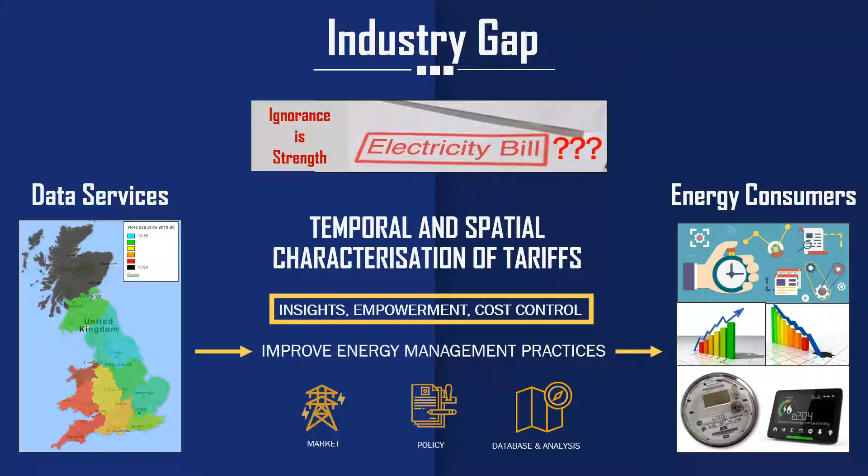So we think that by offering these price signals, insights and empowerment to the consumer should take place to drive energy efficiency, improve energy management practices, and drive change to be more efficient. So how does this work?

Basically, there's more than around rough - I categorize 14 tariffs in the UK electricity bill, although there's more because some of them you can break down further still. But basically, what we try to propose is that for every half hour, we allocate a price to each tariff, composed of the commodity price, but then there are also some other key temporal elements such as the balancing use of system charge, coupled with the network operators, which operate on a 3-tier system - red, green, and amber - as well as some capacity charges and reactive power charges.

Then we combine these tariffs with governmental incentives such as contracts for difference, capacity mechanism, renewables obligation, and if you lump in the transmission network operators' charges - called TNUoS in the winter - you can start depicting, as in the figure below, the pence per kilowatt hour that a specific consumer is being charged. So by presenting these sorts of visuals, it becomes very easy to understand the most critical times for running your operations. These variations will occur on a daily basis, with particular differences between weekdays and weekends, as well as winter and summer periods.

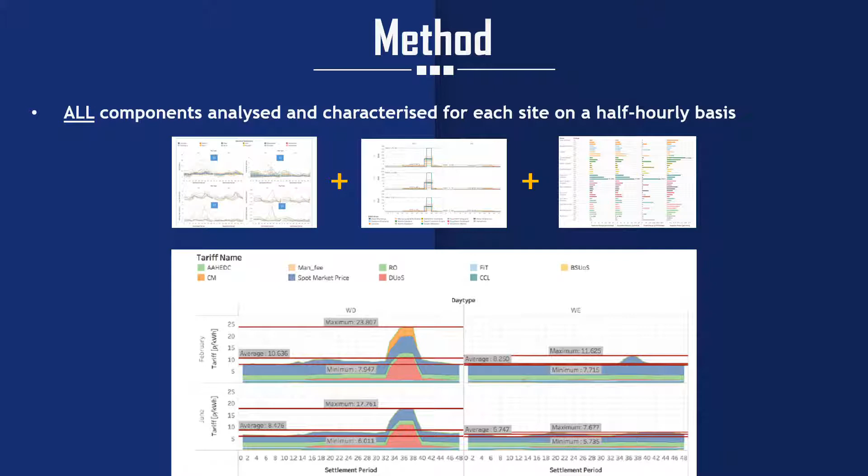So what insights can this data provide? Well, it'll allow you to understand how your energy expenditure breaks down, spot critical cost periods. It can also help you for budgeting and billing validation purposes.

We've done this exercise with a large consumer, and right now we're within a 1% margin of error in the billing validation. It could also help on the pre-feasibility of investment analysis, such as driving energy efficiency or installing new technology like heat pumps, batteries, etc. It could also help you validate your investments. Jason made the point that once you invest in a technology, it's very complicated to do the validation, or a lot of people don't go through it, but these sorts of data sets could help you do it easily.

Then, if you want a long-term horizon to understand how prices could evolve over time, you could also do a forecasting exercise. Next is multi-site property analysis. You'd be able to understand how each site's usage and load drives prices differently, and inform a more comprehensive investment strategy.

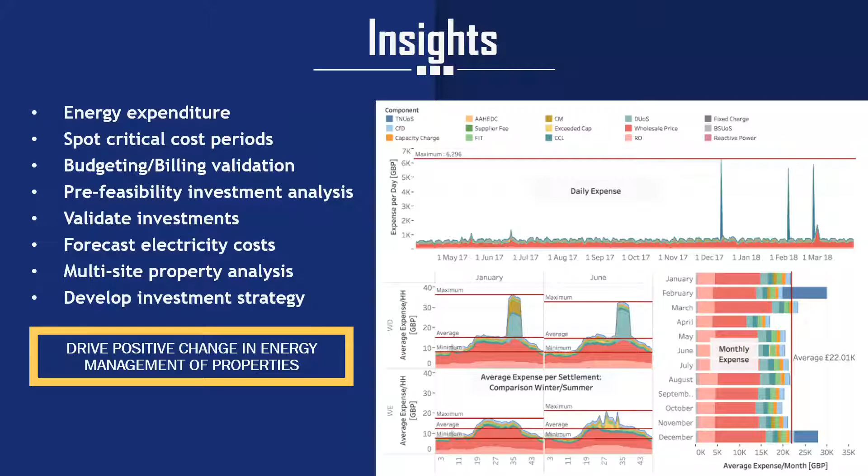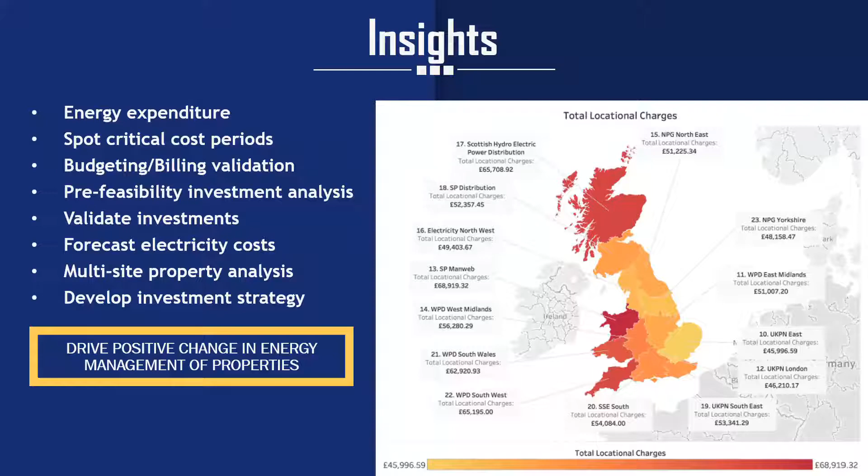Know that since it's a bottom-up approach, you can go as deep as you want into the granularity of understanding what's driving your costs. Likewise, if you have different properties, in this case across the UK, you'd be able to spot the differences in how a similar type of operation, be it a hotel or an academic institution, could incur different costs depending on where it sits in the network. We think this sort of information really helps inform the strategy decision of which properties you should focus on first rather than later when developing energy efficiency investments.

So we've been developing a proof of concept. We've been working with a large food retailer, Sainsbury's - I don't know if you know them, but they're quite big in the UK. We have applied the concept and validated it. We are using this information in their organization to drive decision making, especially for technology investment.

And we have this information available via an API, so if you're interested, you could trial this information and see what value it brings to your organization, if there's anybody here with UK operations. Basically, this is what we wanted to showcase - that this information, even though it's complex, you need to constantly stay on the ball trying to understand how regulators and different players are influencing your electricity bill.

It is possible to quantify it, calculate it with a good degree of accuracy. It has been validated. We are independent, and it has been automated. If anybody wants to learn more, happy to have a discussion or answer questions. Salvador, thank you very much.

So Salvador showed me this a few weeks ago, and what's interesting is I think most of us, in terms of C&I, have a bureau service, which is basically bill validation. We have that reasonably well covered, and we get some nice charts telling us how much money they're saving us. What I like about this is it takes it down to the per-site level - so if I'm right, you use postcode and meter based data, taking the MPAN in the UK or whatever.

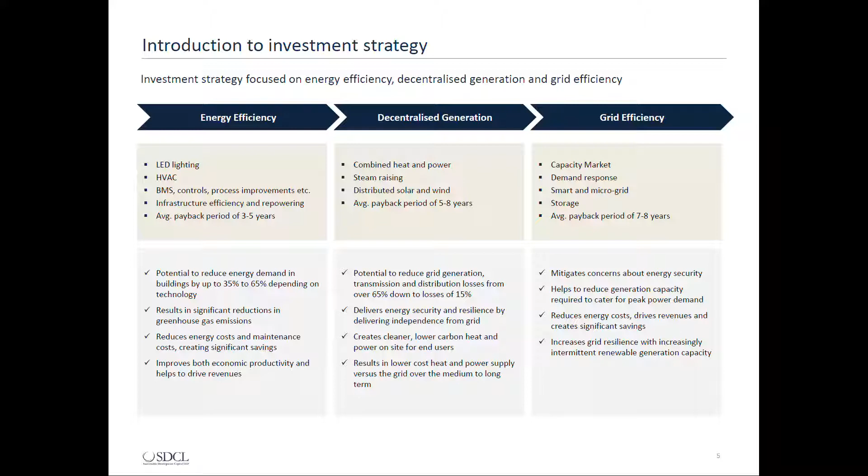So what we focus on is around energy efficiency, distributed energy generation, and also smart grid. When we're looking at energy efficiency, we're looking at things like lighting, building management systems, heating, ventilation, air conditioning. On the distributed, decentralized generation, it's very much around combined heat and power plants. We've worked particularly closely with a local Austrian company called GE Jenbacher on combined heat and power plants. And then we work looking at storage as well, another big area for us. But all of these are around developing and financing energy efficiency projects.

So energy efficiency, why is it so interesting? It's because it's free, basically. It's money being wasted by companies now, where they're paying higher energy bills than they should be. If they would put in better equipment, they'd be saving a lot. If you look at lighting, you can get up to an 80% saving by taking out fluorescent tubes and putting in LED lights. And that will obviously have a bottom line impact. So it's around financial performance of companies.

It's also around their environmental performance, their sustainability goals, which are creeping up the corporate agenda, being more and more important. And the third area, which we're finding is particularly important in the UK and also in the northeast of the US, is concerns about grid power outages. There's stress on the grid, more and more demand through electrification of transportation. Looking at the UK, you've got 9 gigawatts of coal coming offline, being replaced by intermittency through renewables—about 50% of generation of power in the UK now. But people want to have a core base load, and that is often at jeopardy if you're reliant on the grid. Hence distributed generation being more and more important for manufacturing companies.

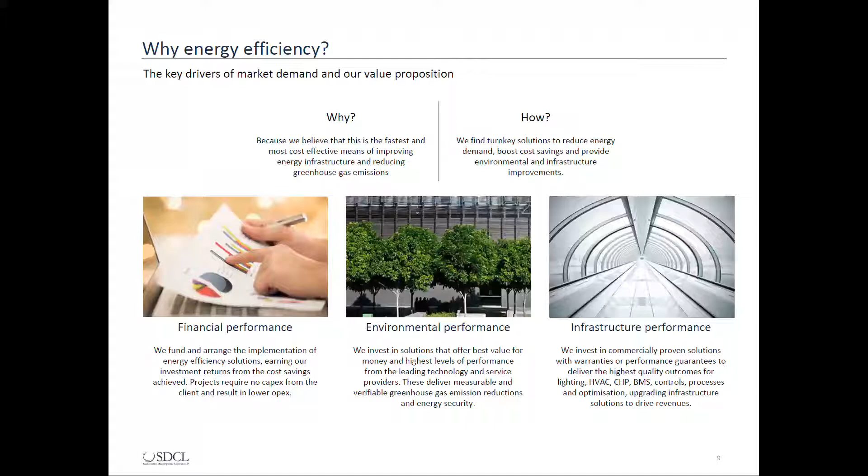So what we do is bring together a solution working hand in glove with the host company or public sector entity. We bring the capital, but also we bring the technology partners, working closely with GE, NG, Siemens or Philips, depending on who the technology provider is for the need of that particular company.

Normally it's a portfolio of solutions, so it'll be a mixture of lighting, HVAC, generation as well, could be solar, could be wind. It's about implementing that project. We deliver their regulatory compliance, important for more and more companies, with reporting not just to government but also to stakeholders, plus the energy savings and improvement of their infrastructure. One of the assets we invested into was really around improving the safety of employees and customers with enhanced lighting and improving the customer experience as well.

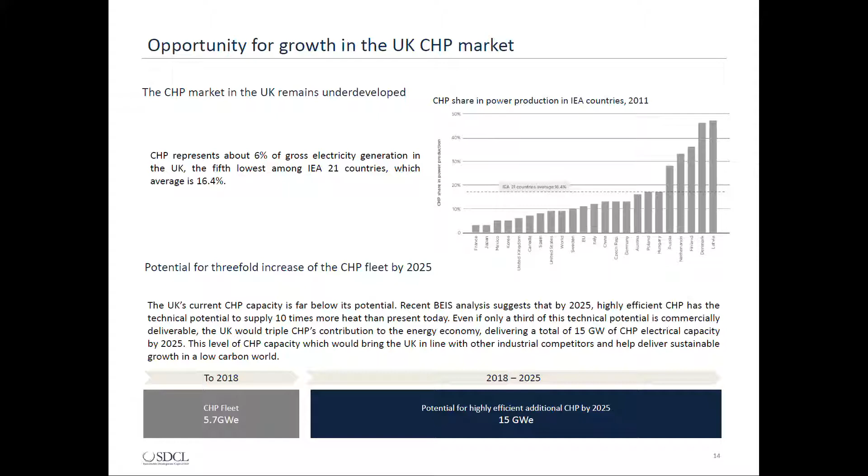The UK generates about 6 gigawatts of power from combined heat and power plants. That's going to increase threefold, up to another 15 gigawatts of power coming online, which will give a lot better opportunity for companies to have decentralized generation, control over their own power, and potentially their own private wire development of energy, which they could oversize and generate for third parties as well.

Lighting has similar growth trajectories. If you go back only a few years ago, it wasn't really the norm to do LED lights, whereas now it very much is for companies. If you're going to be doing anything around lighting, you're going to be doing LED, and we're going to see that forecast to grow quite dramatically over the next couple of years as well.

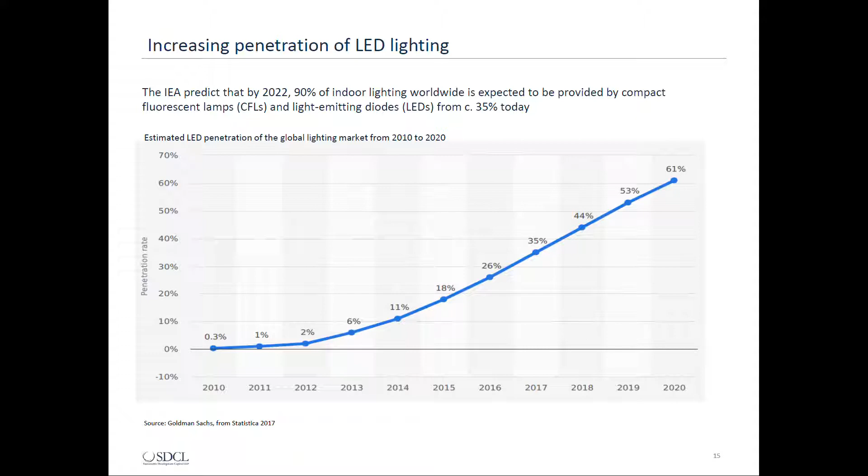So in conclusion, over the two key areas for us around CHP and lighting, but generally for many other sectors of technologies as well, it is a very attractive market to be working in, to be developing and investing into, and getting better solutions for host companies around their energy dilemma.

Just quickly walk you through a few case studies. This was for Citigroup, based in London, at their data center where they're processing a lot of data for themselves but also for third parties. They wanted to reduce their energy costs, but also make sure they had higher security levels around the generation of power. So we put in place, working with Clarke Energy, who's a distributor for GE Jenbacher, a combined heat and power plant solution, but also cooling.

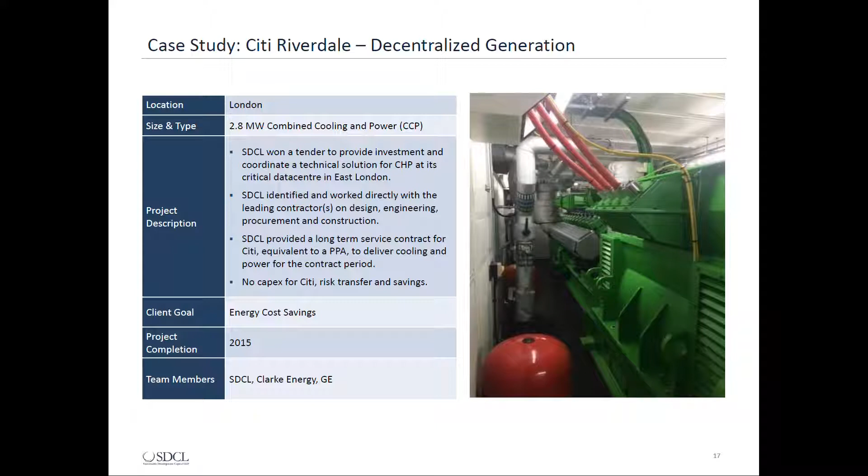We basically installed a 2.8 megawatt plant for Citigroup at their data center in order to reduce their costs, but also give cooling, which is becoming more and more important for data centers taking on more and more demand of energy and needing greater cooling levels, but also independence from the grid. So it's not necessarily putting one CHP there, it's putting multiple CHPs in order to guarantee the 5 nines of security on supply.

St Bartholomew's, a cancer hospital in London. Again, we put in place CHP. Their rationale was also around carbon savings. It's very important for them, but they achieved both energy savings and carbon savings by putting in place a CHP 1.4 megawatts in size.

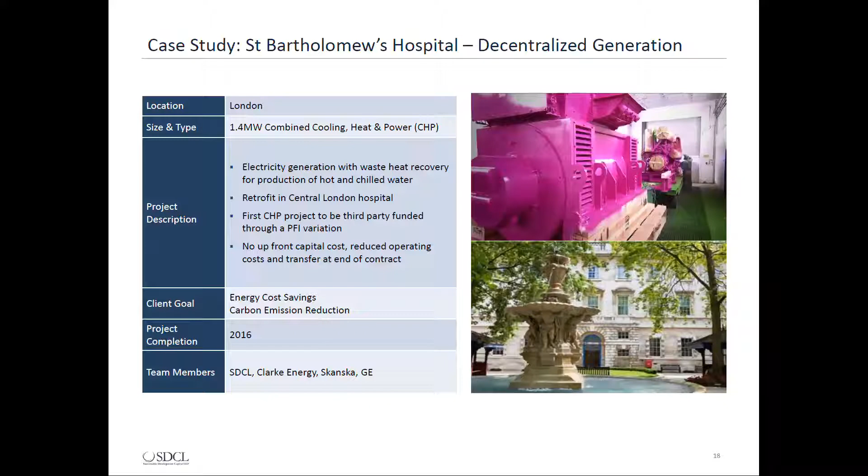So those are just two examples of distributed generation. A couple of examples on lighting: this is Santander's branch network across the UK, just over 790 branches. What they were driving at was really to get enhanced lighting, better lighting for their customers, but also for their staff working there. We also installed building management systems, heating, ventilation, and air conditioning into their 14 offices.

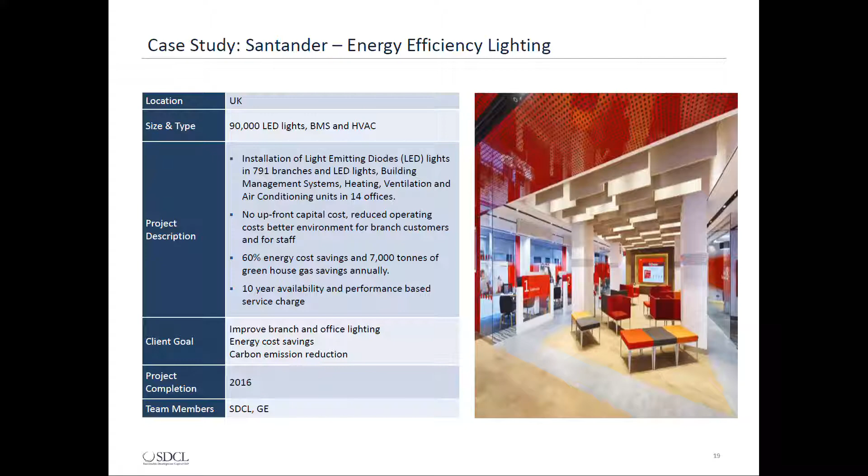They wanted carbon savings, saving 7,000 tons of carbon a year. The other reason for doing this is operation and maintenance, reducing the need for staff to go in and replace light bulbs and disturbing the branches.

This was the last case study I'm going to share: National Car Parks in the UK. You can see a clear difference between the before and after impact of lighting. The driver for National Car Parks was actually about revenues, because women were scared to go into car parks at night, as the dimly lit ones didn't feel safe. By putting in new, more efficient lighting, they felt safer, so more people went into car parks at night, which enhanced revenues and also saved money through carbon and energy savings. That's a quick snapshot of what we've been doing.

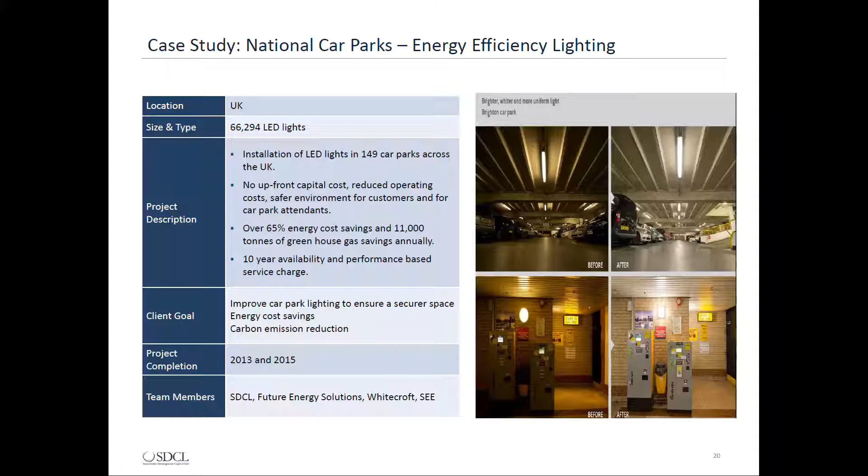If anyone's got any questions around energy efficiency, financing, or doing projects, I'd love to hear them.

Well, I've got questions. Grab a microphone, is there one around? Yeah, come sit down.

It almost sounds too good to be true, in the sense that we come to you with an energy efficiency project, you finance it, and Bob's your uncle. Obviously it doesn't work like that, because if it did, we'd all be doing it today. What are the good ways and the less good ways to use external financing to help fund projects that we just can't get across the line internally in our own organizations?

Often the challenge for doing energy efficiency projects within companies is around the corporate cutoff on paybacks. A lot of people look at it as, okay, corporately we'll do 2 or 3 year payback projects ourselves, and the rest we won't do. That leaves the low-hanging fruit easy to do within the company, and leaves the harder ones for third parties to do.

To do those projects you really need engagement from both sides, between the developer, financier, and the host company. The host company needs to allocate somebody to work with us to develop and do the project. You shouldn't look at it as just capital coming in, because too many companies think they just need cheap capital to get it done. These projects are actually fairly complex, it's not just a matter of going in and switching a light bulb. You need a whole deployment plan, and you need to partner with the right technology provider, otherwise you end up installing equipment that may not be appropriate.